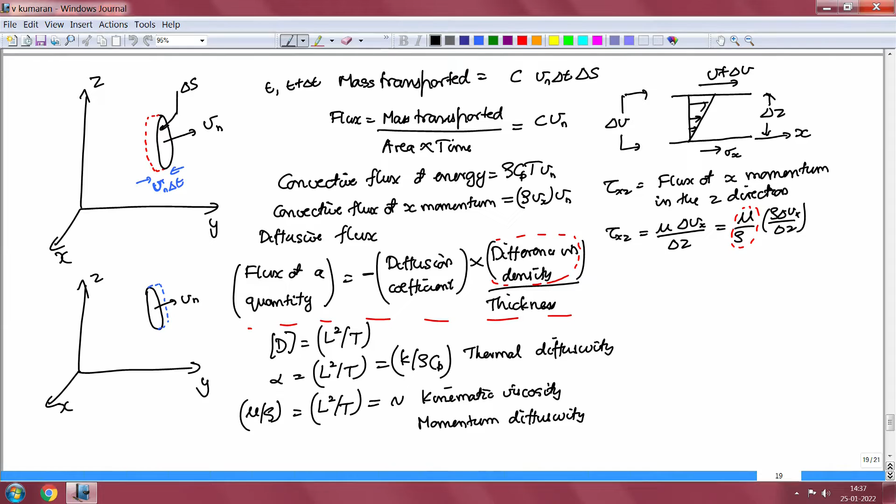I illustrated that in the last lecture by looking at a surface within the fluid. If there is a flow velocity, then as the fluid flows across the surface, material is transported from one side to the other. The transport depends only upon the velocity perpendicular to the surface, because the velocity parallel to the surface does not cause any transport.

If we consider a time interval delta t, the volume transported across the surface within delta t is equal to the velocity perpendicular to the surface times delta t. Therefore, the mass transported is equal to the volume transported times the concentration, or mass density: C times V n times delta t times delta s. The volume is delta s times thickness, which is V n times delta t, so the mass transported is C V n delta t into delta s.

Flux locally is defined as mass transported per unit area per unit time, equal to the concentration times V n. So the flux across a surface is the local value of the density—concentration for mass flux, energy density for energy flux, momentum density for momentum flux—times the velocity perpendicular to the surface.

I should note that in the limit as delta s goes to 0 and delta t goes to 0, the volume transported across the surface goes to 0, but the flux is finite, because it is the ratio of concentration times volume divided by area divided by time interval. So this flux remains finite in that limit, and it is uniquely specified at each point for a given surface orientation. For a given surface orientation, you find the velocity perpendicular to the surface, and from that you know the flux across the surface for fluid convection.

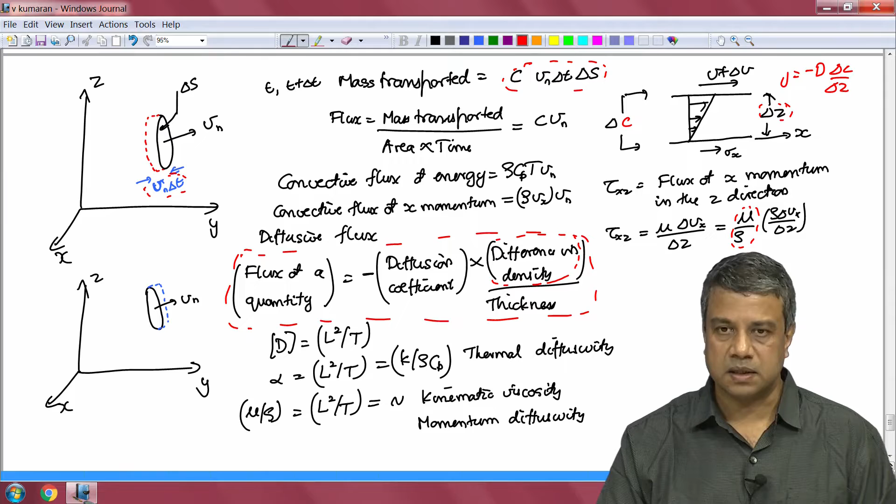Once we have these definitions of the flux, we can create dimensionless groups. Velocity has dimension length per time, and the diffusion coefficient has dimensions length squared per time. Therefore, velocity times the characteristic length divided by the diffusion coefficient is a dimensionless number—that is the ratio of convection and diffusion.

For mass, it is a Peclet number: the velocity times the characteristic dimension, divided by the mass diffusion coefficient. For energy, it is a Peclet number for energy transport: the velocity times the length scale divided by the thermal diffusion coefficient. For momentum, it is the Reynolds number: velocity times length scale divided by the kinematic viscosity or momentum diffusivity. You can also define Prandtl number, Schmidt number, and Lewis number as ratios of two different kinds of diffusivity.

Prandtl number is momentum by thermal diffusivity, Schmidt number is momentum by mass diffusivity, and the Lewis number is thermal by mass diffusivity. These are the independent dimensionless groups that we had encountered earlier.

The dependent dimensionless group is the dimensionless flux. The Sherwood number is the flux divided by, if you recall, the right side of the quantity having the same dimension as the right side of Fick's law, D delta c by the length scale. The Nusselt number is the average heat flux divided by k delta t by the length scale, and conventionally the dimensionless momentum flux is scaled by the inertial scales.

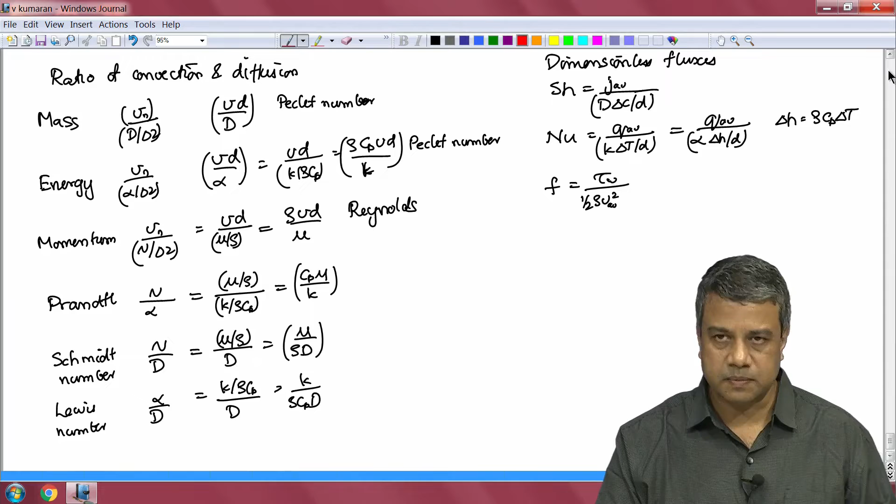So before proceeding to look at correlations for these, let us first discuss a little bit about what are the characteristic length scales and what are the characteristic velocity scales for different configurations, both for internal flows as well as for external flows.

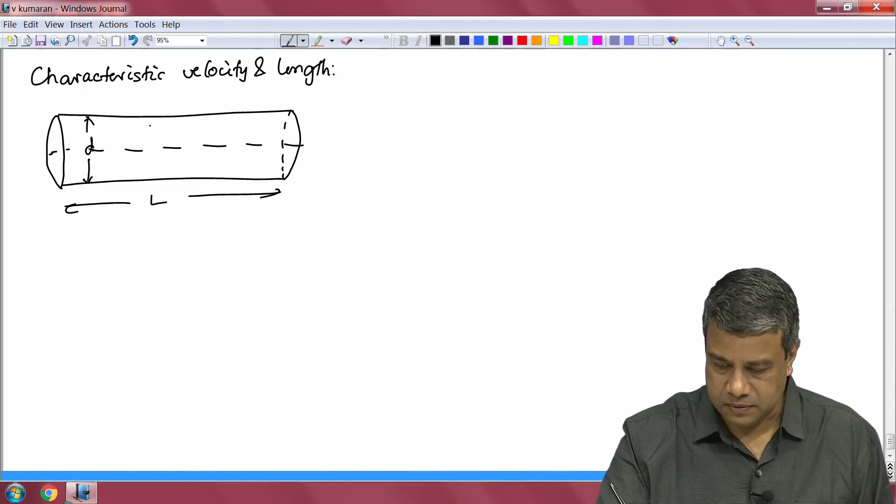A typical internal flow is the flow through a pipe, of length L and diameter d. For this flow through a pipe, it is quite easy to justify the characteristic velocity scale as the average velocity, which is basically the ratio of the flow rate and the cross sectional area of the pipe. So V average is the characteristic velocity scale, and d, the pipe diameter, is the characteristic length scale. In internal flows, usually the length of the pipe L is much larger than the pipe diameter.

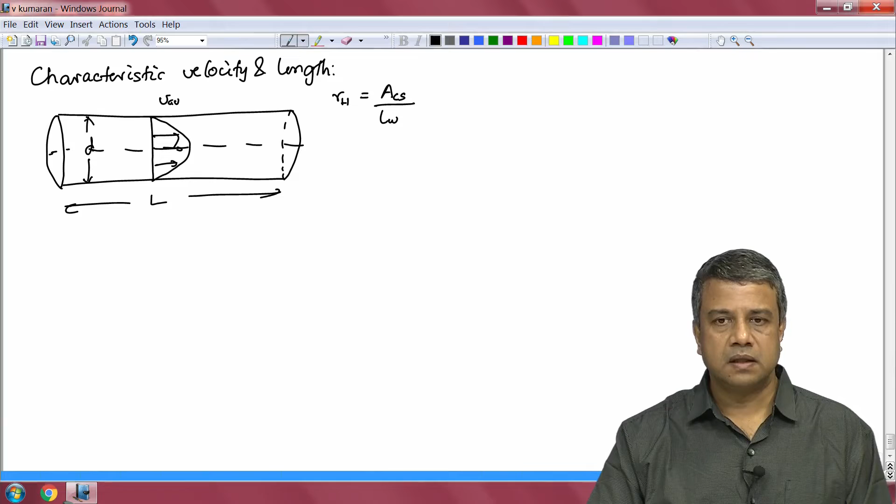What would you do if the pipe does not have a circular cross section? How do you define the characteristic length scale in this case? The way it is defined for internal flows is to define something called a hydraulic radius: the cross sectional area divided by the length of the wetted perimeter. The wetted perimeter is the perimeter of the pipe that is wetted by the fluid. For a circular pipe, this wetted perimeter will be a circle, and the hydraulic radius is defined as the cross sectional area divided by the wetted perimeter.

If you had a rectangular pipe, for example, the cross section would be a rectangle, and the wetted perimeter will be the sum of the sides of the rectangle. The cross sectional area will be the cross section of the rectangle. So you take the cross sectional area and divide it by the wetted perimeter, and that is the hydraulic radius. For a circular pipe, the cross sectional area is pi d squared by 4 and the wetted perimeter is pi d, the perimeter of a circle being pi times the diameter. So this is effectively d by 4.

And if you had a rectangle of width w and height h, then the cross sectional area will be equal to w into h, and the wetted perimeter will be 2 into h plus w, the sum of the lengths of all 4 sides of this rectangle.

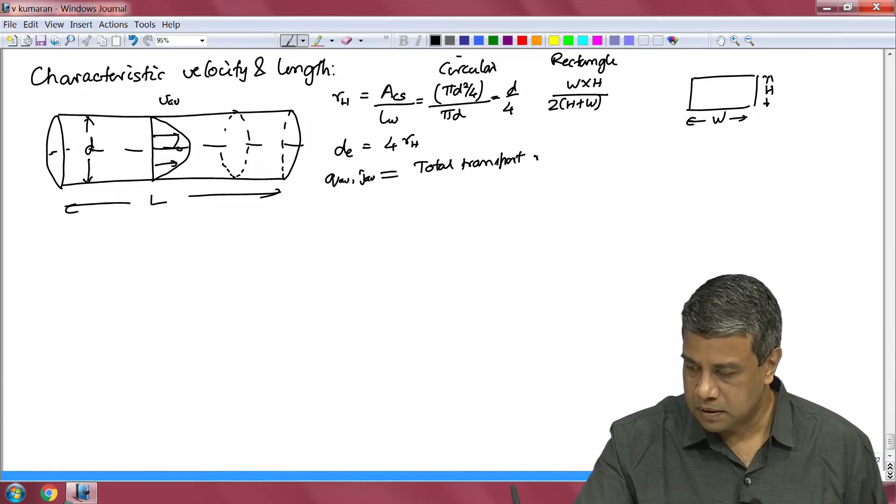Once you have calculated this hydraulic radius, the equivalent diameter is defined as 4 times the hydraulic radius, not 2 times. This will be equal to the diameter for a circular pipe. So for an internal flow, this is the characteristic length scale. The characteristic velocity scale in all cases is equal to the average velocity, the ratio of the flow rate and the cross sectional area. The average fluxes are basically defined as the total transport rate by the total surface area.

The average flux is defined as the total transport rate divided by the total surface area, which equals the total transport rate divided by the wetted perimeter times the length. The wetted perimeter is the length of the perimeter of the cross section; times the length gives you the total area for transport.

Now, for an external flow, a flow past an object, if you have a circular object, you can easily define the characteristic length scale—that is just the diameter of the object. The characteristic velocity scale is what is called the free stream velocity.

If the object is moving relative to the fluid and the fluid is stationary at infinity, the characteristic velocity is the velocity of the object relative to the fluid far away. It is called the free stream velocity, the velocity far from the object.

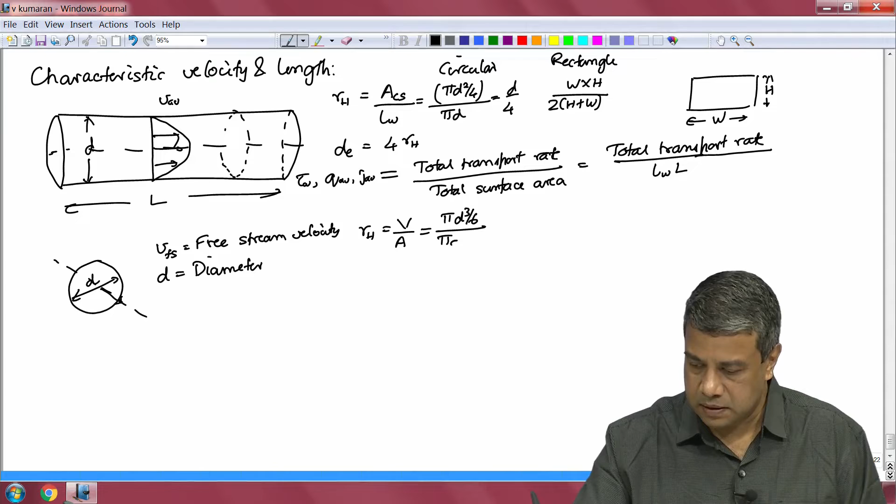For those more comfortable with the radius of a sphere, the volume is 4 by 3 pi r cubed, and substituting r equal to d by 2 gives pi d cubed by 6. The surface area is 4 pi r squared, and substituting r equal to d by 2 gives pi d squared, so the hydraulic radius is d by 6.

The characteristic length, equivalent diameter, which is the characteristic length for this case, is defined as 6 times RH for 3-dimensional objects, and 4 times RH for 2-dimensional cross sections. This makes it equal to the diameter for a spherical particle, and the characteristic velocity is what I call the free stream velocity.

Typically, you would have either the particle moving relative to the fluid, as in the case of a particle settling in a fluid, or an object falling in air—the fluid far away is at rest, and at the surface of the object there's a certain velocity. The difference between the surface velocity and the fluid far away is the free stream velocity.

If you had fluid flow past an immersed object, for example flow in a fluidized bed, then the particle is on average stationary—its velocity is zero—but the fluid away from the particle is moving with a fixed velocity, and that is the free stream velocity.

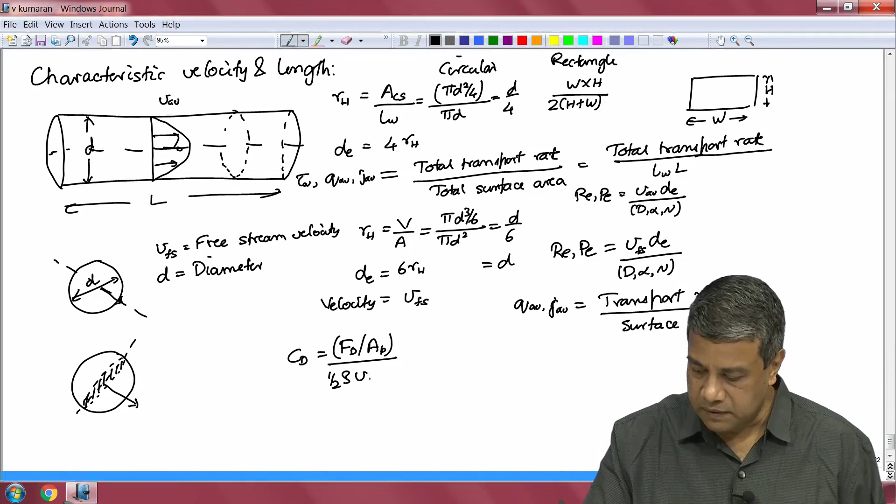In this case, it is not the friction factor, it is what is called the drag coefficient, defined as the drag force divided by the projected area, divided by half rho times free stream velocity squared. So it is defined as the ratio of the drag force to the projected area, not the drag force to the total surface area of the sphere.

So for momentum transport, recall that in the case of the drag coefficient for flow past objects, you take the ratio of the drag force and the projected area, not the drag force and the total surface area of the sphere.

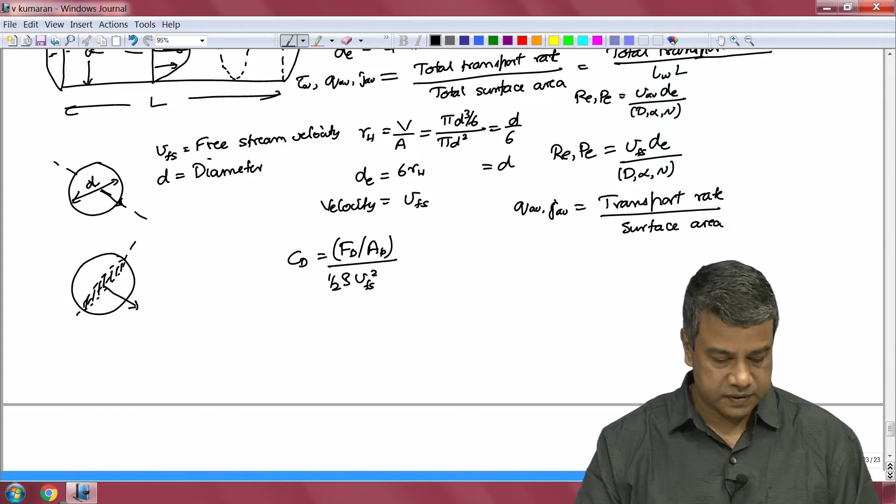Whereas in the case of transport in a pipe, the friction factor is defined as the wall shear stress divided by half rho V average squared. So that is one major difference.

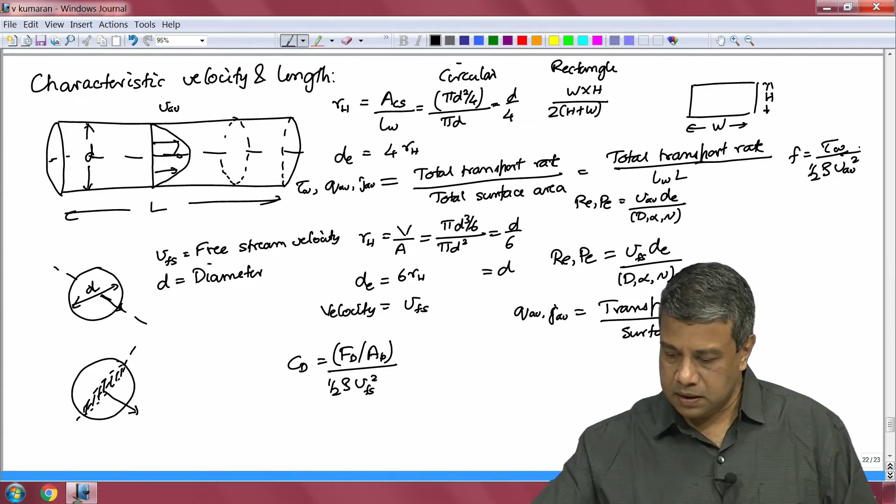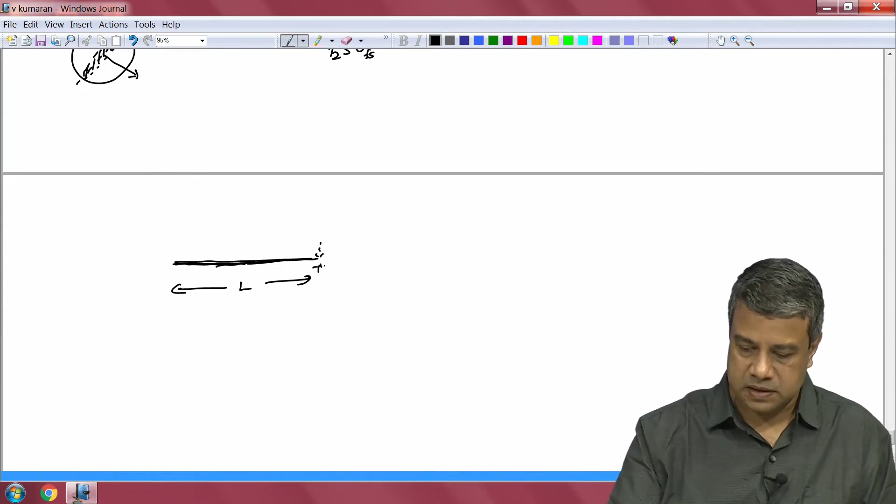The other kind of configuration you might come across is flow past a flat plate, of length L and infinitesimal thickness, across which there is a flow, and there could be either mass transfer or heat transfer in this flow past a flat plate.

For heat and mass transfer, the flux will be defined. Let us assume this plate had some width W in the direction perpendicular to the flow. So you had a flat plate, length L along the flow direction, streamwise direction, and width W perpendicular to the flow, with infinitesimal thickness, so that there is very little blockage of the flow due to the presence of this plate.

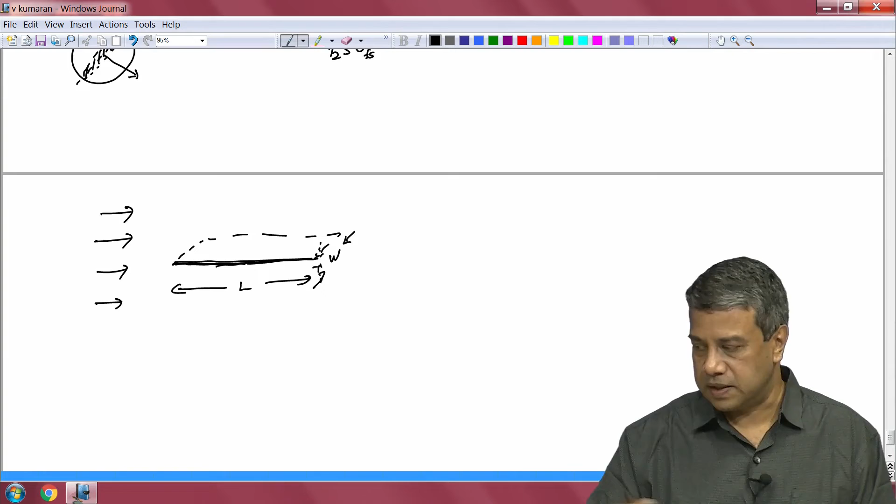In contrast to a sphere settling, where the sphere presents substantial blockage to the flow, due to which the fluid flow streamlines have to curve around the object. So these are what are called bluff bodies.

At high Reynolds number, the drag force in these cases is because of the pressure difference between the upstream and the downstream hemispheres.

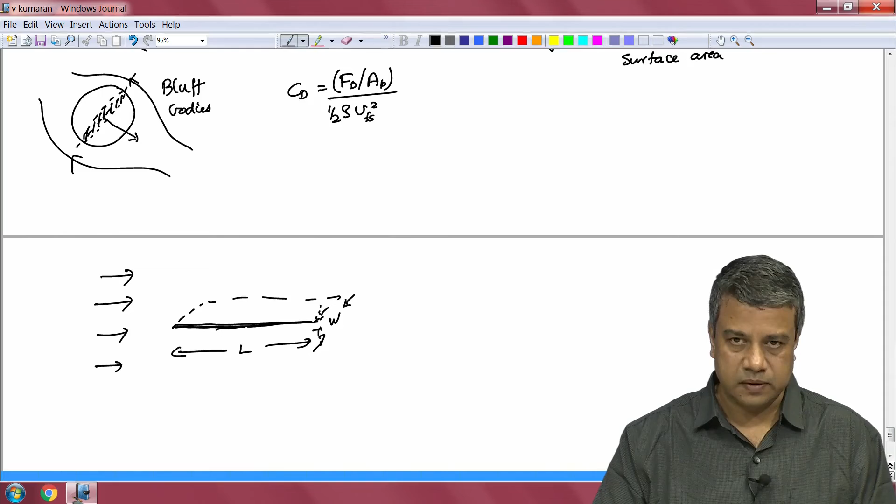In contrast, for these kinds of slender bodies, for which the projected area is very small, most of the force exerted on the object is due to the shear stress acting at the surface of the object.

In this case, because the projected area is infinitesimally small and the major contribution to the force arises from the tangential stress, what is called the skin friction factor, the dimensionless momentum flux, the skin friction coefficient, is defined as the drag force divided by the tangential surface area, divided by half rho V free stream squared, where V free stream is once again the velocity of the fluid relative to the object far from the object.

So in this case you divide by the tangential surface area that is parallel to the flow for a slender object when you define the skin friction coefficient. Whereas the drag coefficient for bodies which substantially block the flow, where the projected area is comparable to the size of the object, you divide by the projected area. So that is the difference.

In this case, the length scale is the length of the plate, because the dimension perpendicular to the flow is infinitesimally small.

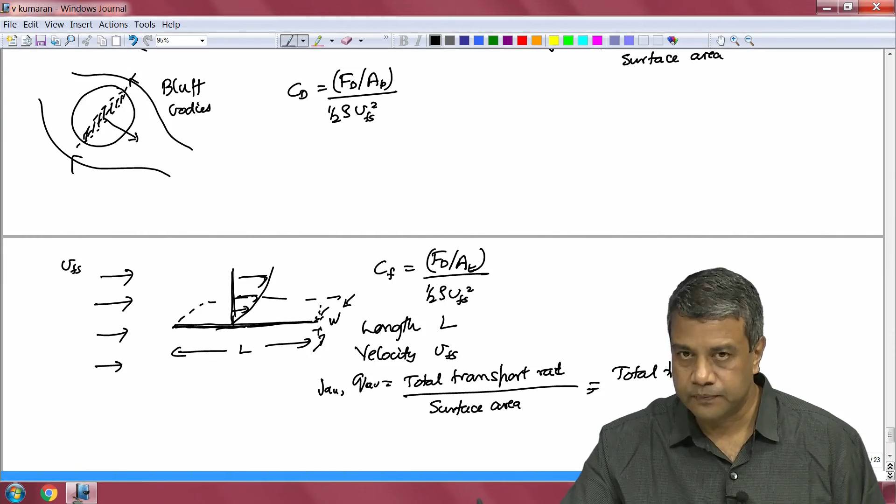The velocity is the free stream velocity. The average fluxes for other quantities, for momentum, mass and energy, is the total transport rate divided by the total surface area, which is basically total transport rate divided by L into W. That is how it is defined for a flat plate, for example. The Reynolds number is defined as V free stream into L by nu.

The Peclet number is defined as V free stream into L by alpha, alpha being the diffusion coefficient. The fluxes are defined based upon the total area, and the skin friction coefficient is also defined based upon the total area of the surface that is parallel to the flow. Only for a three-dimensional object which is blocking the flow is the momentum flux defined based upon the projected area.

So these are the definitions of the characteristic length and velocity scales for different kinds of flows. For internal flows, length is equivalent diameter, velocity is average velocity. For external flows, for mass and heat transfer, the length is the equivalent diameter. Area is the surface area of the object, and the velocity is the free stream velocity.

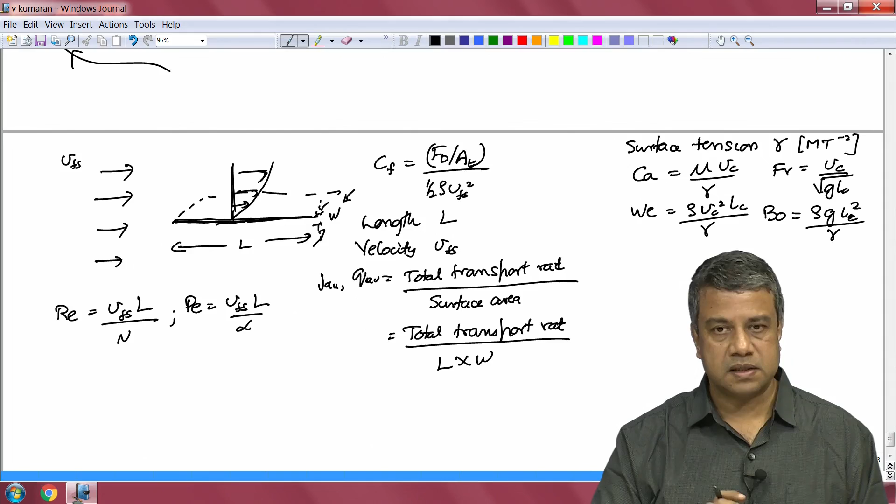In the next lecture onwards we will take a closer look at different kinds of flows, the momentum transfer in different types of flows. We will start with an internal flow, the flow through a pipe, and then progress to flow past a flat plate and flow of an object in a fluid. We will examine each of these individually, their characteristics, and the kinds of correlations used to describe these flows. We will continue this in the next lecture. Thank you.